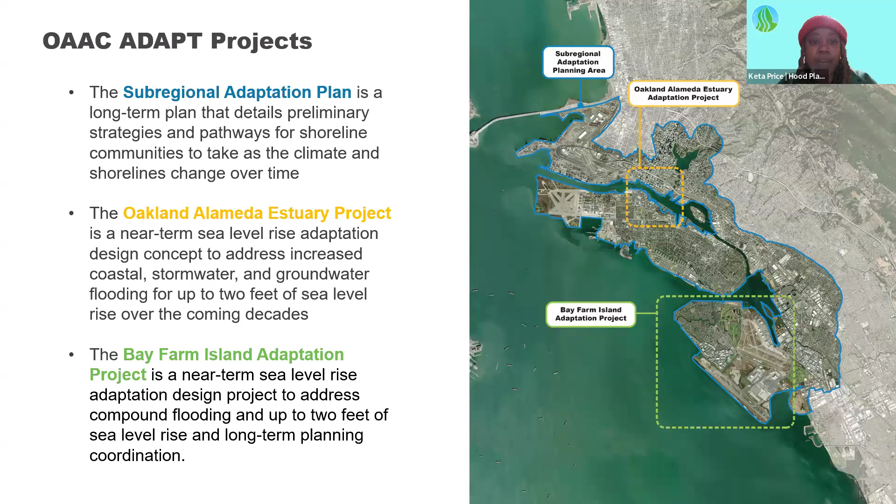Yesterday we had our Bay Farm Island workshop, and if some of you were there, thanks for coming today as well. Today we are really focused on the Oakland and Alameda Estuary project.

There are many other adaptation projects currently underway with other OAAC partners and community partners in our sub-region. Some examples are here: we have Sacred Spaces, which is an outdoor sanctuary at the MLK Junior Shoreline down in East Oakland. We have the San Leandro Creek Trail Greenway, which is providing access from East Oakland to the MLK shoreline. We also have the Port of Oakland's Vulnerability Assessment and Adaptation Plan, as well as the San Francisco Bay BCDC, known as the SF Bay Conservation and Development Commission's Regional Shoreline Adaptation Plan, which we call the RSAP. It's a mouthful and it's a lot to consider, but we want to make sure that we're doing our diligence, not just leveraging the adaptation strategies, but uplifting different values across these different plans that make sense with what we're doing.

Next, I want to share a little bit more of our sub-regional goals as an OAAC committee. We have these shared waterways, so we want to protect our Oakland and Alameda subregion from negative effects of expected sea level rise, inland flooding, and groundwater flooding that we are presented with today and in the future.

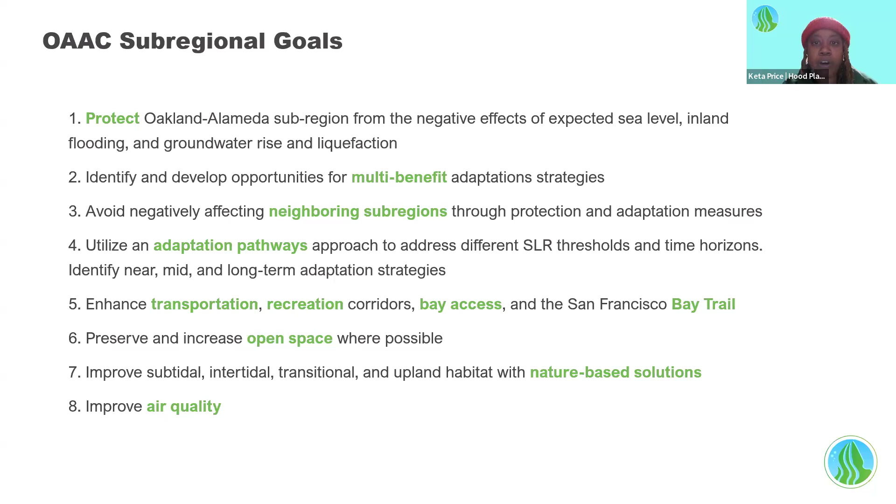Before I hand it off to my co-chair of the OAAC, Danielle Mueller, I just want to go over a few ground rules as we get deeper into our workshop.

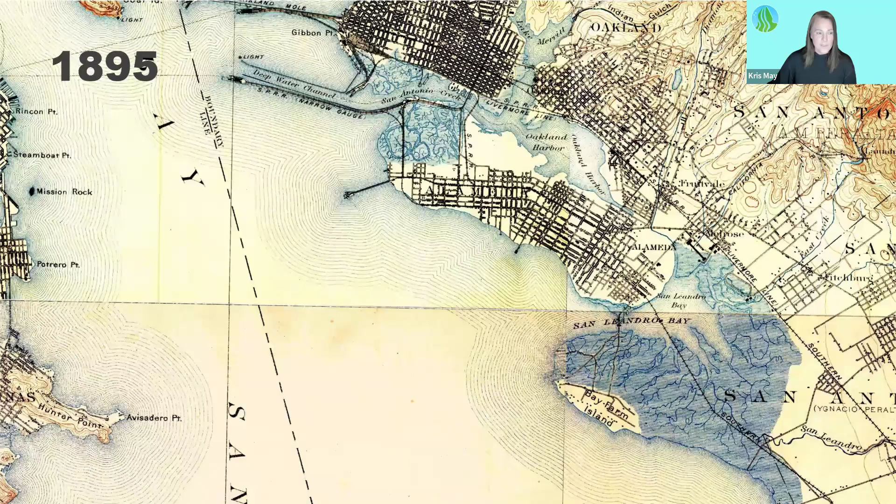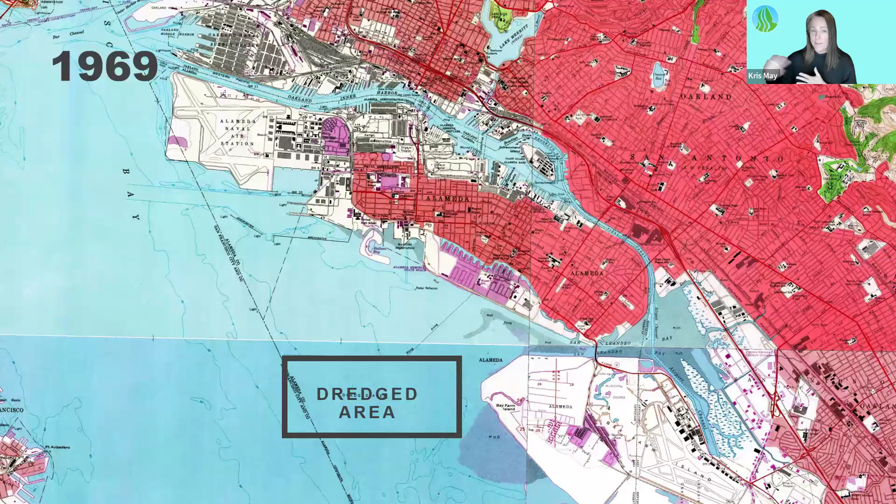So if we flash forward to 1969, that's 75 years later, this area has been entirely transformed and developed. This shows just how much we can transform the landscape over 75 years. I want you to keep this in mind as we think about how we're going to transform this landscape moving forward into the future.

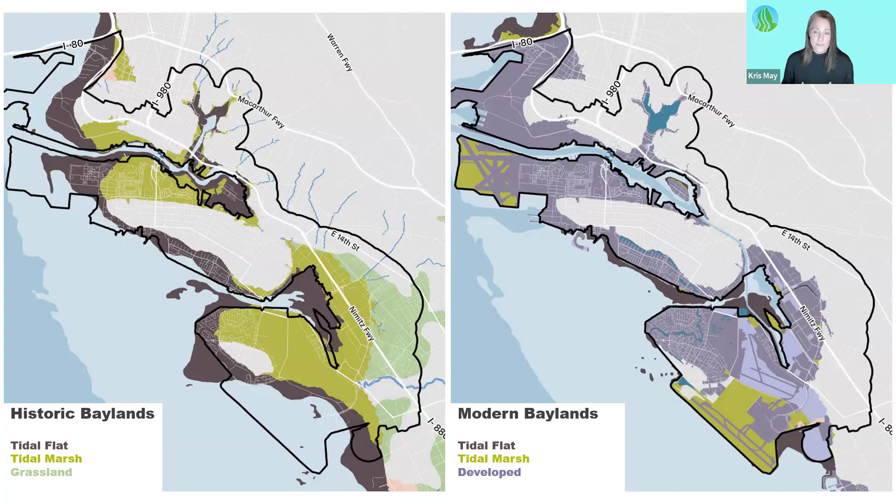So now that you understand a little bit about the past, let's talk about what's coming in the future. Hopefully everyone in this meeting understands that our climate is changing, and in many ways it's changing faster than climate scientists thought it would. Our planet is getting warmer, and this is changing how all of our climate systems function. No matter how well we think we understand what may happen in the future, Mother Nature is always full of surprises, and she usually wins.

Climate change is really changing everything. We are operating under a new rule book, but we don't know all of the rules.

There is a lot of uncertainty related to how fast sea levels could rise over the next 100 years or so. Based on the latest science, we generally use a range of 5 sea level rise scenarios from low to high. The difference between these scenarios relates to how warm the world may get, or how well the global community may reduce greenhouse gas emissions to avoid getting to those higher levels. Based on state guidance, we usually plan for the intermediate scenario, which gets us to 3.3 feet of sea level rise at the end of the century.

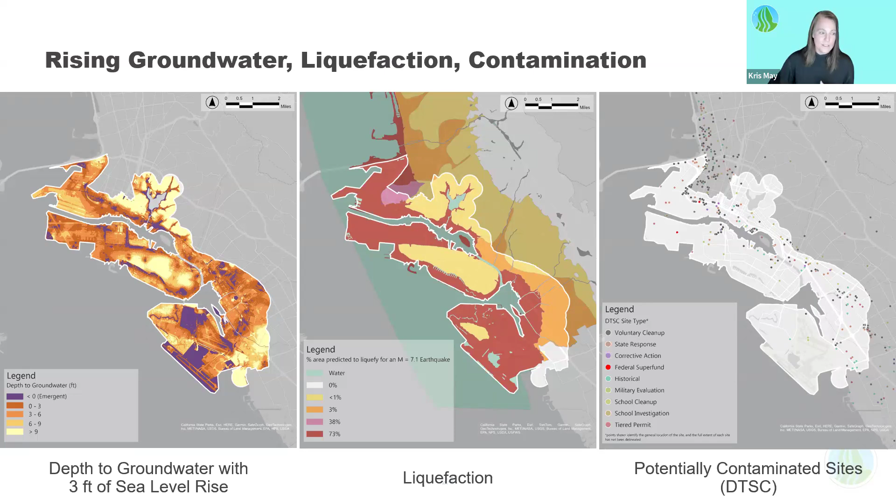In this workshop today, we're really focused on near-term adaptation. What do we need to do first? We're not trying to tackle the entire shoreline in one go.

Our near-term adaptation options are tackling just 2 feet of sea level rise, which could occur between 2060 and 2080. This is our goal, but individual site considerations will drive how high we can adapt in the near term. However, we will always keep our longer-term goal of 7 feet of sea level rise in mind. I mean, I'm only 5'4" tall, so 7 feet of sea level rise is a lot.

Our goal is to adapt the shoreline in a stepwise manner over time so that we're not just cutting us off from the bay and the shoreline prematurely.

So we are starting now with immediate actions that address really urgent risks, and near-term actions that can address that 2 feet of sea level rise. As we design these adaptation strategies, we want them to be flexible to accommodate higher amounts of sea level rise, so we can start planning for the next adaptation action, that midterm adaptation action that would come next.

That midterm adaptation action would come next. And if we're really headed towards 7 feet of sea level rise, we also want to look towards that longer-term adaptation that a future generation might need to implement.

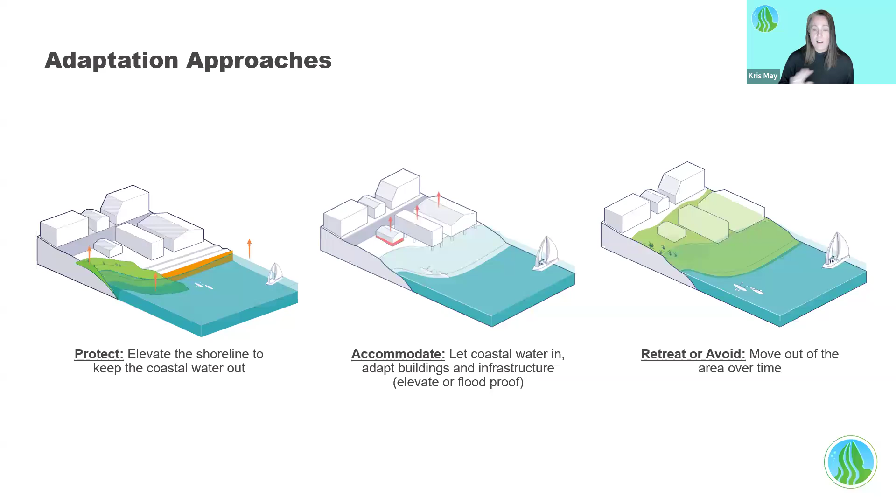Although we may not need to retreat today, it's important to start this conversation, because retreating from some locations could be part of the long-term adaptation plan. Most likely, we will use a combination of all of these approaches along our complex shoreline.

We need to adapt both at the shoreline or around the shoreline for sea level rise, while also managing for stormwater and groundwater changes. This will be a combined adaptation effort that addresses all of the different flood hazards.

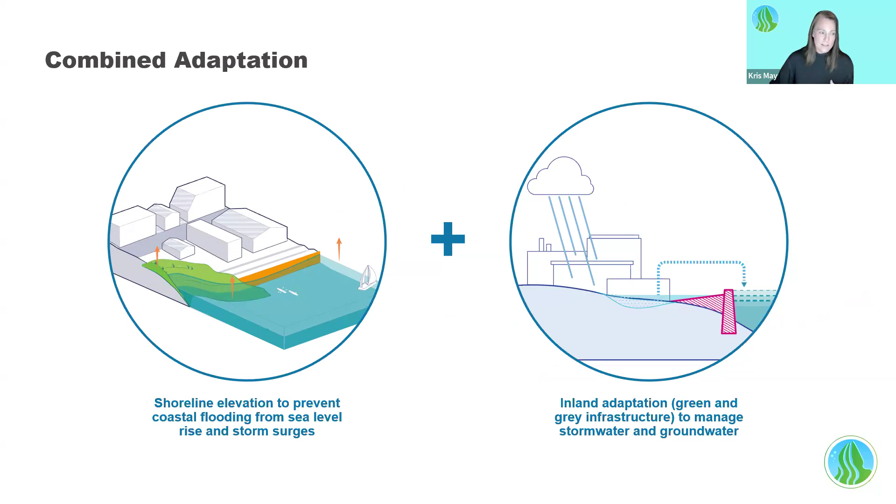This will all lead up to big changes, especially when we look at that long-term planning horizon. These kinds of changes can be really hard when we're talking about where we live, work, and play. I live in Alameda and my home is in that vulnerability zone, so I know it's hard and personal.

But remember how much our landscape changed over the past 75 years? We can implement that scale of change again. And if we do that together in a transparent manner, our goal is to reach good outcomes for everyone.

Remember, today we're really talking about the first adaptation actions, those near-term actions, with the goal of addressing two feet of sea level rise.

We want to design them in a way that is flexible and allows for future adaptation options. That can mean addressing higher amounts of sea level rise, but it also means giving future generations options in what they can do. We don't want to lock them into just one potential option in the future.

The range of options available to future generations is connected to the choices we make now, so we need to design and think with that long-term planning horizon in mind.

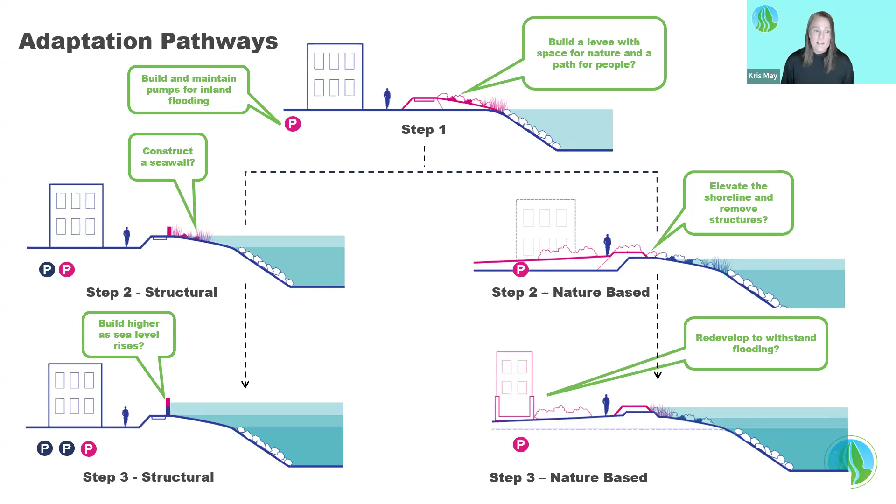There are many adaptation measures we can implement to adapt our neighborhoods to this scale of change. These are just some examples, from gray infrastructure like pump stations and seawalls to nature-based approaches like tidal marshes combined with levees.

We've heard through our engagement efforts to date the importance of expanding opportunities to improve ecological health and providing space for habitat and wildlife. There are already a lot of projects underway around the subregion and around the Bay supporting this goal, including pilot projects and longer-term studies that will help us expand the range of feasible nature-based solutions.

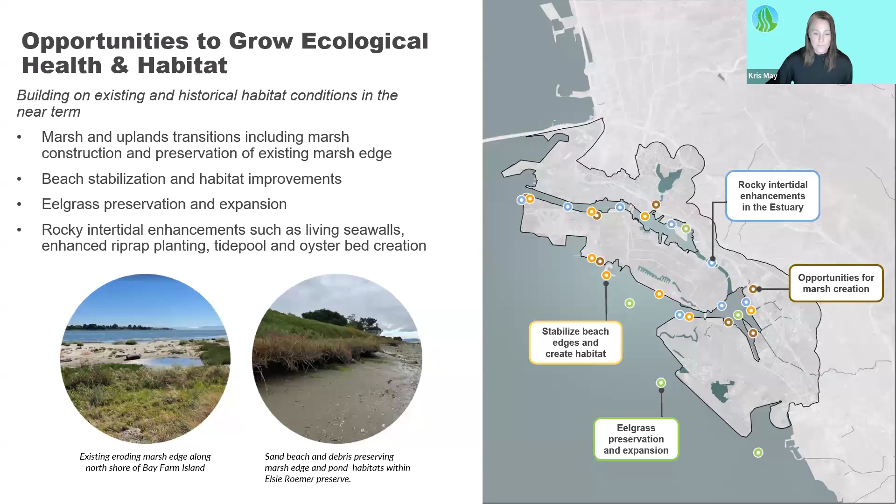Here are just a few examples of how we can integrate habitat and ecology into how we adapt our shoreline, often combining nature-based solutions and more engineered structures in innovative ways so we can meet a combined set of complex goals. And with that, I think we're going to open it up for some Q&A.

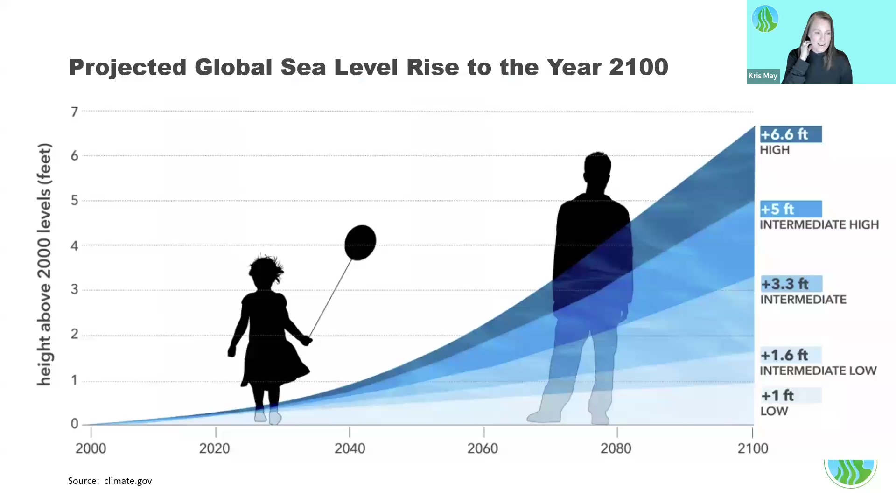We're talking about just one near-term action today on the estuary project for Oakland and Alameda, but we are in the process of developing the long-term plan, really looking up to those higher levels of sea level rise as well, to 5.5 and 7 feet for the entire island of Alameda. So there's a lot of work to be done. It's not going to be easy, and there will be a lot more engagement as we move this process forward and we start talking about strategies in other parts of the shoreline.

One other question, kind of about an area outside of our current project focus. I'm curious which adaptation strategies are being implemented at Alameda Point to accommodate the new development there. I don't know, maybe Chris or Jamie or one of our City of Alameda, or Dilip, I saw you come off mute. If someone wants to provide a little bit more information on that project, that'd be very helpful.

Yeah, I can go. Yes, we were involved with 2 of the developments there, and the strategy there is they are raising the parcels. So pretty much, they have raised themselves out of the near-term sea level rise vulnerability area itself. I think they raised it about 3 feet or 3.5 feet above the 100-year tide. At which point, yes, there would be further adaptations needed, but they have left a significant amount of room to make those adaptations for the future.

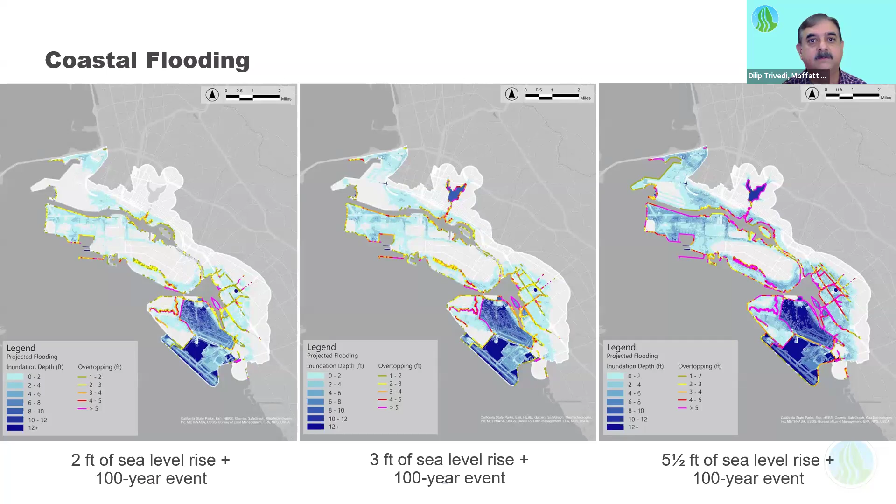Great, thank you, Dilip. All right, so maybe one final pretty big question here, and then we should move on to the next segment of our presentation. As a reminder, we've documented all of your questions and we will be responding to the rest of them at the end. So final question: how is equity and climate justice being taken into account in the strategy and approach? Maybe I'll try to send it over to you, Chris.

Well, I think it might also be a question for Danielle and Kita and others. I think just the way OAC was put together, with such a focus on the community partners, having Kita co-chair the steering committee has been a really big part of addressing climate equity. So I don't know, I might not be the best person to kick it off, but I am impressed with how much engagement this effort has.

Yeah, sorry, I'm trying to look at the question to get it right technically. I can repeat it. The question was just, how is equity and climate justice being taken into account in our strategy and approach? We're just seeing if it was like an approach in the projects or the OAC.

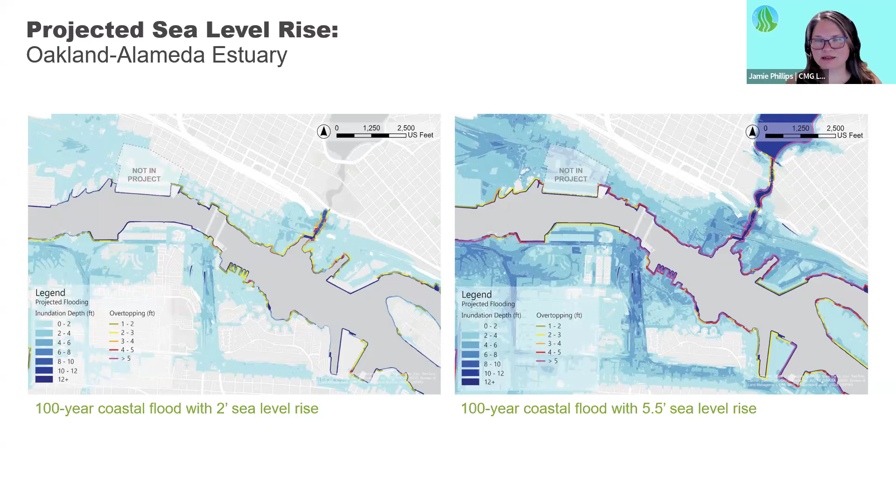With rising sea levels, that will also lead to rising groundwater, and we already experience groundwater flooding in many of these areas. We're also aware that many of these areas may have soil contamination, and with rising groundwater, that contamination could mobilize. So through the course of this adaptation work, in areas with contamination, we may need to do soil remediation as part of these adaptation projects going forward.

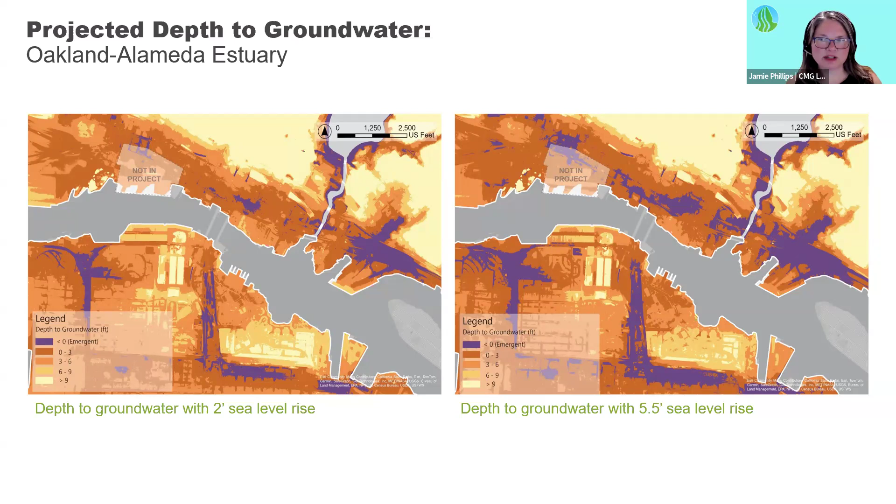It's all connected, it's very complex. But in addition to addressing the risk of sea level rise, there are opportunities in the area to expand bay habitat in the estuary and improve the ecological function of our shoreline.

Then in some areas along the shoreline, we have a little more space, so we may be able to construct gravel and cobble slopes that create more intertidal habitat, and places for people to get down to the water's edge as well.

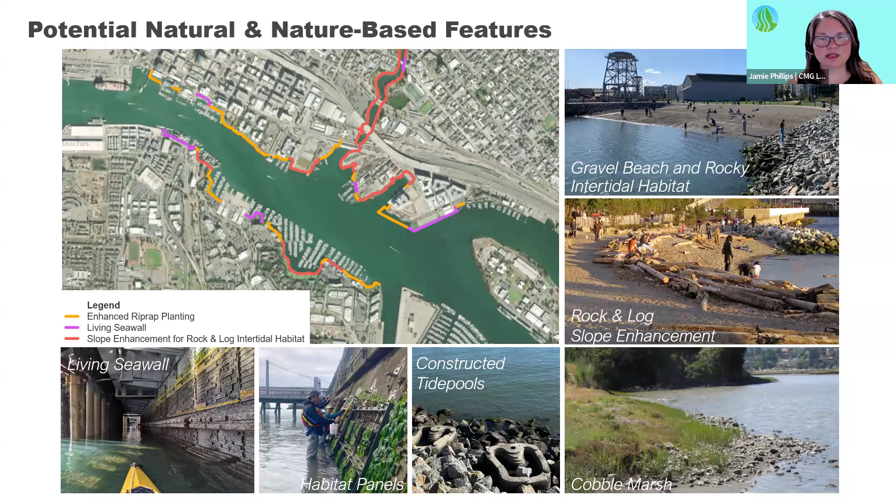Since this summer, when we saw you all at community workshops, we have further evaluated the alternatives we shared, and we've refined those alternatives into design concepts.

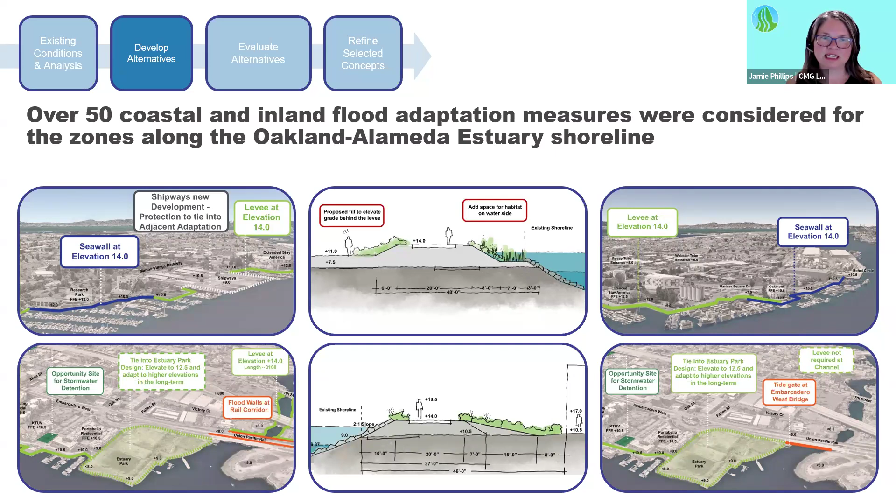The team looked at over 50 ways of approaching and adapting the shoreline along the estuary. We then took those alternatives and assessed them individually relative to the OAAC project charter and the project principles Keita read out at the beginning, as well as project planning principles that are part of the region. We evaluated the alternatives relative to each other.

We considered how they can meet the priority evaluation criteria that we all developed together. Some of that evaluation is things like: does this provide coastal flood protection? Is it possible for it to be FEMA accredited coastal flood protection? And what is the cost of this adaptation measure relative to another?

Throughout the estuary project, we took a look at those alternatives, and then elevated the ones determined to align with the OAAC charter, the project planning principles, and the priority evaluation criteria - identifying which was best for each zone of the shoreline. We developed those into recommended concepts that I'm going to share with you today.

These concepts are not fixed or final. We just have to take each step along this long path that we're on together, and this is one of the first steps toward developing these concepts. They meet the goals of the project, but will require further study around feasibility and cost, and how they fit in with other plans for development and infrastructure within the region.

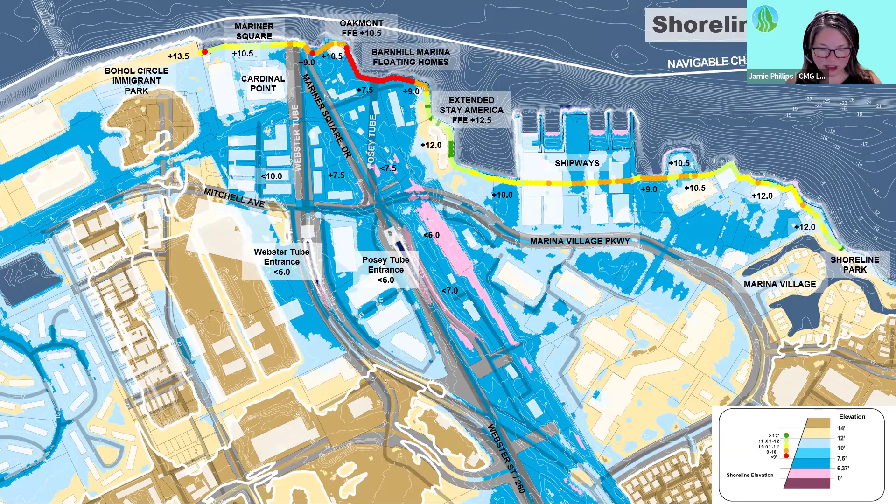Looking specifically at the edge, you can see the red showing us the lowest point along the shoreline on this northern edge of Alameda. That red zone is the area most susceptible to coastal flooding from the shoreline overtopping. Those elevations are actually below today's king tide, so it's extremely low - that's why it's a near-term project and we're working on a way to solve it.

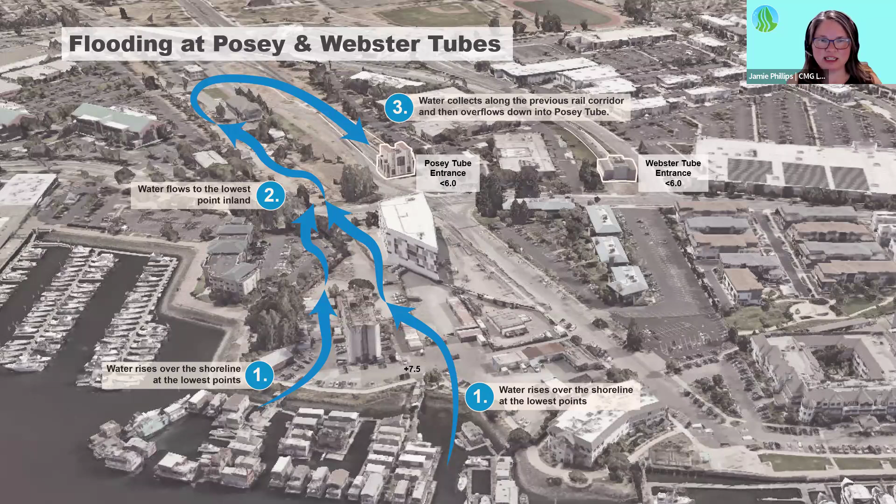This is another view of that area to describe the concern. Down at number 1, this is a very low shoreline. The high tide could overtop here, and it actually continues to be low on the way inland. So water could overtop the shoreline, flow inland along this low elevation, and then flood the entrance to the Posey tubes.

So we are at this stage where we have a proposed concept for this adaptation. I have two reaches I'm going to take you through and zoom into. I'll show you first this western section that goes from about Cardinal Point down to the Shipways area, that upper left. Okay, zooming into this plan.

Let's look first to the left side there. That is a stretch from basically Bohol Circle Immigrant Park around to Oakmont. Today there is a seawall there, and there's also limited space between the Oakmont residential building and the shoreline. So for this first reach, we are recommending a seawall, constructed to the water side or outside of an existing seawall that is there today. The area is narrow and the constraint of the existing seawall pushes us to recommend this. But seawalls are one of the most expensive adaptation measures, so we've tried to limit where we propose them. They require extensive environmental permitting and agency coordination, and when we think about adapting further into the future, they're harder to adapt — it becomes a wall higher than humans, and we start to disconnect ourselves from the shoreline.

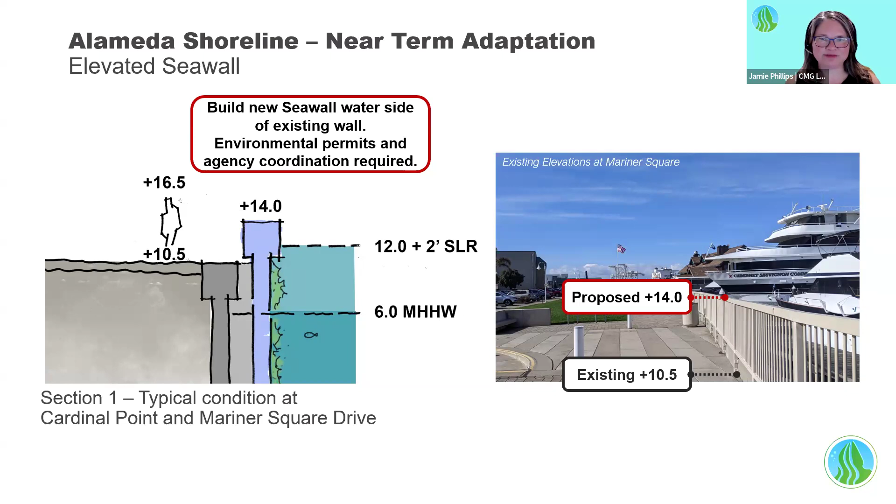In this location, though, we'd be proposing one of those living seawall solutions, so we do have the ability to add some habitat and ecological value there. Going back a slide to point this out again — this seawall would stretch from Cardinal Point all the way around the Oakmont residential building, primarily because of how close Oakmont is to the shoreline and the existing seawall that's there today.

So the next reach we'll look at is between these two red marks, the Barnhill Marina. That's the zone at a very low shoreline elevation today. What we propose here is a levee to protect the shoreline, raising the edge to elevation 14. This would protect the inland side, and also protect access for those living in the Barnhill Marina floating homes, so they can have pathways and ways to get out to their homes from their parking area. There would be a bay trail along the top of it, and a bit of space on the water side for some intertidal habitat, with park space and pathways on the inland side.

So to look at that in a section, it looks like this. This is one of these areas where there's physically more horizontal space between the shoreline and any structures in the Barnhill Marina area, which gives us more room to work. You can see this very low elevation in the lower left, elevation 7.5, and we would need to build this levee up to elevation 14 to protect in the near-term horizons that Chris May described, protecting for 2 feet of sea level rise.

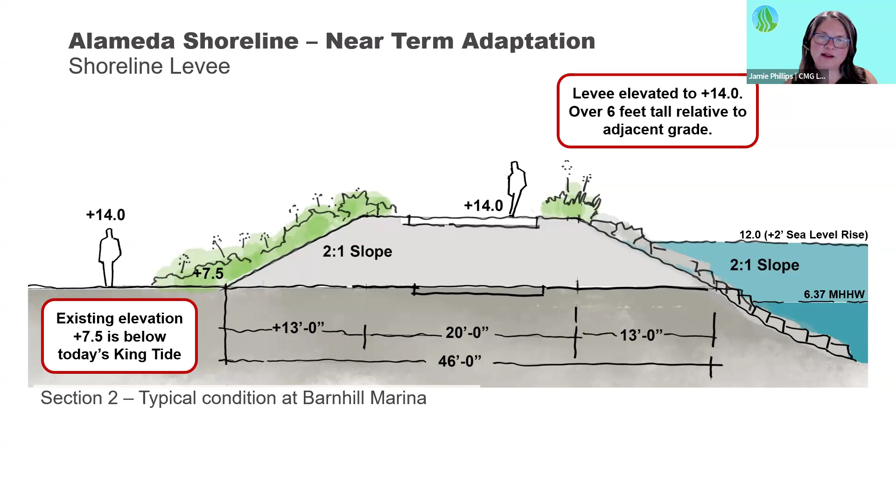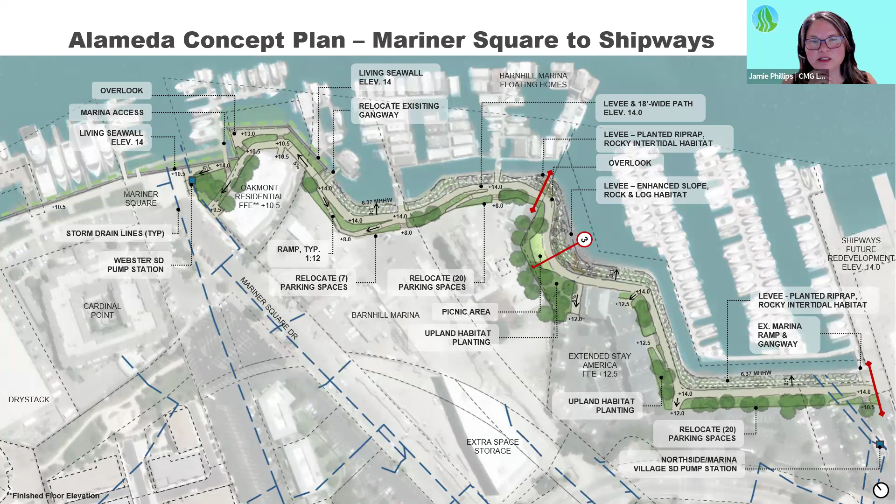The third reach here goes from Barnhill Marina down to the Shipways site. Here again we have more horizontal space between the shoreline and say the parking area at the hotel, but also the ground elevation comes up here as well, closer to 12 or 12.5. So the improvements don't end up needing to be as high. Here's a perspective view starting to describe how, when we raise this elevation from 10.5 to 14, we start to get some habitat value on the water side, and then grade back into park spaces so the whole thing feels like a more connected and accessible public space for everyone.

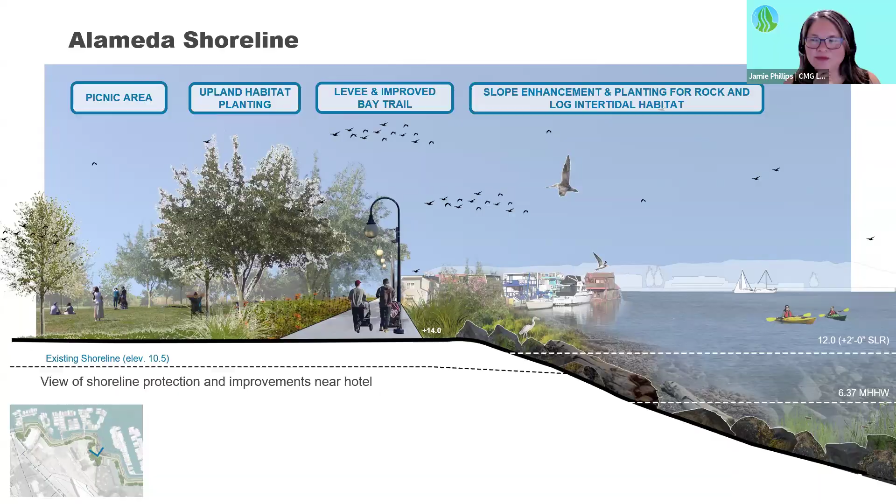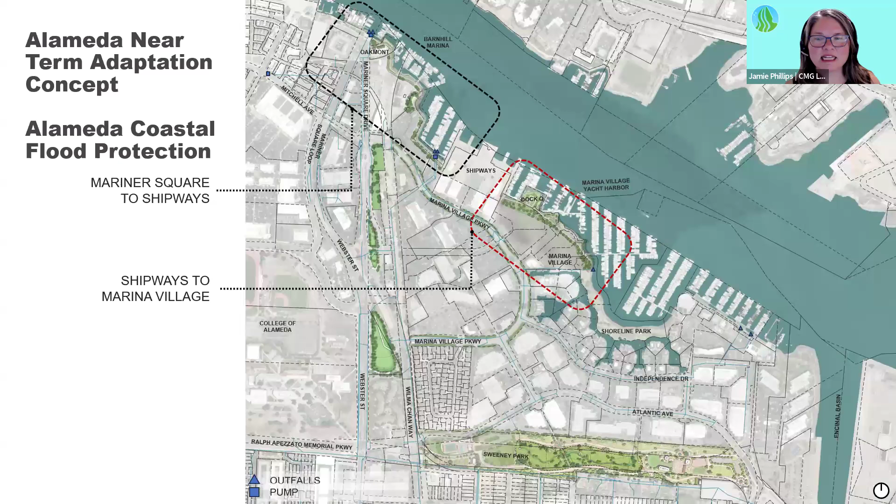And then there's the Shipways site, and another reach that we studied. I want to mention that the Shipways site has a separate redevelopment planning project underway — they are also looking at an adaptation for that site up to elevation 14. So we will coordinate with their proposal on both sides, tying in our improvements to theirs, so we start linking all of these together.

So this is the Marina Village commercial area between Shipways and Shoreline Park, not the Marina Village residential area. Here we're taking another approach. We've had some very preliminary conversations with the property owner — the existing buildings are very close to the shoreline, some within 10 feet, so there's very little room to fit adaptation in there other than a seawall. It's possible this property could be redeveloped in the time frame we're talking about.

And this is another way to think about adaptation at the shoreline. If those existing buildings are removed, the elevation of the entire site could be raised up to 14 and 13, so that we're both protecting from sea level rise flooding and helping with inland flooding — the higher that you are. So this concept plan starts to propose that there would be a park along the shoreline. BCDC's redevelopment guidance is that there should be 100-foot wide public access along the shoreline when there's a redevelopment project.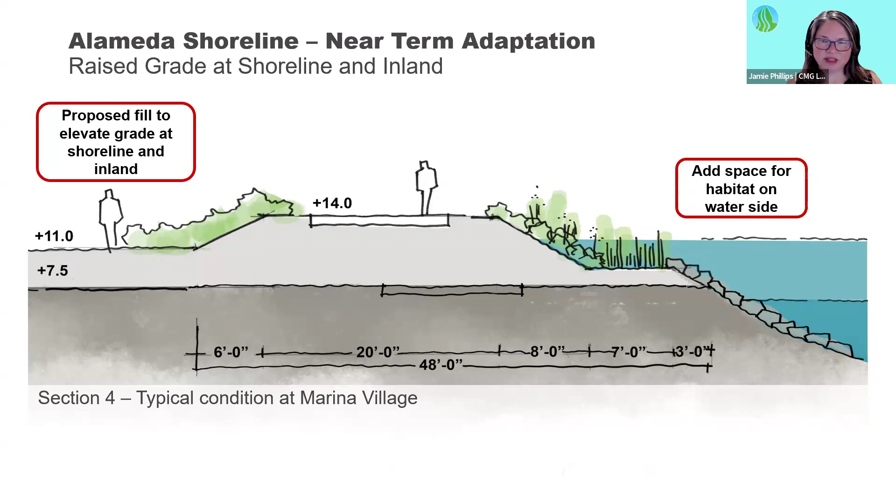In Alameda, we also have put together concepts for adapting to inland flooding. As Chris May described to us, in addition to needing to protect the shoreline from sea level rise, we then also need to protect inland areas from rainwater that gets trapped behind that protection. So we need to add some storage capacity into our storm drain system.

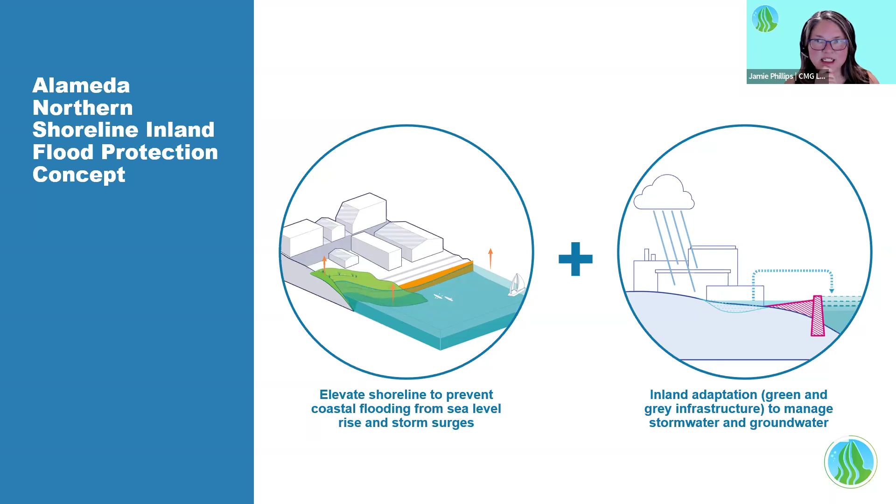So we took a look at this area that is in the same area as the near-term project. This is the storm drain system watershed for this part of the island that flows through the area that we're studying. And this storm drain system today, currently there's a volume of water that is not captured in today's system. So if there were a 100-year, 24-hour storm, all of that stormwater does not fit in today's system.

In addition to that, we expect that with climate change, precipitation will also increase, so we expect there to be even more stormwater that we need to manage in the future. By thinking through this, what I'm about to propose, we're trying to build in capacity for today and in the future so that we can prevent these areas from flooding, people's homes and their neighborhoods. So the idea is that we would build in areas where the storm drain system could detain water without flooding homes and neighborhoods, detain it for a certain amount of time until it stops raining, the tide goes down, and that water can either flow out to the bay or can be pumped out.

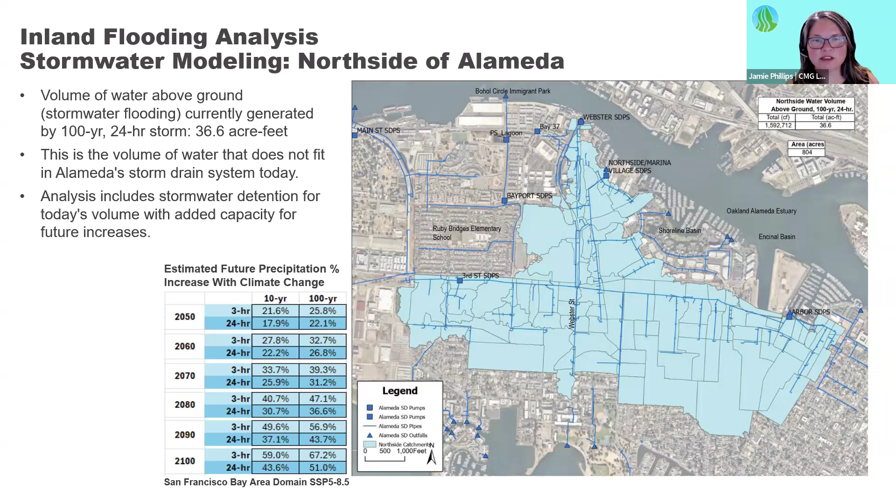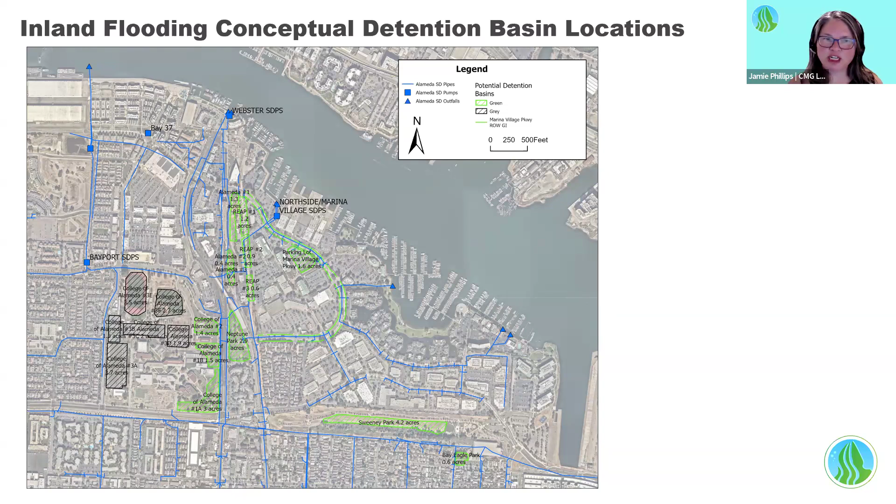So we did study several different areas to look for detention in this watershed. All of them have different pros and cons. Some of the existing land use, some of them are not owned by the city of Alameda. Some of them only work because of their ground surface elevations relationship to the storm drain system's invert elevations. So we took a look at all of these areas, and then we worked our way toward this collection of areas that are on city-owned land or Caltrans-owned land, so that we can start to address the near-term stormwater detention needs in this watershed.

So how this system would work is that during a storm, runoff would be temporarily redirected into these basins and held here until the rainfall stops and they can flow back out. These detention basins sound like infrastructure, but they are green infrastructure. The idea is that they will be at home in a park. The water is stored in the rock layers below in the soil, and then with some ponding.

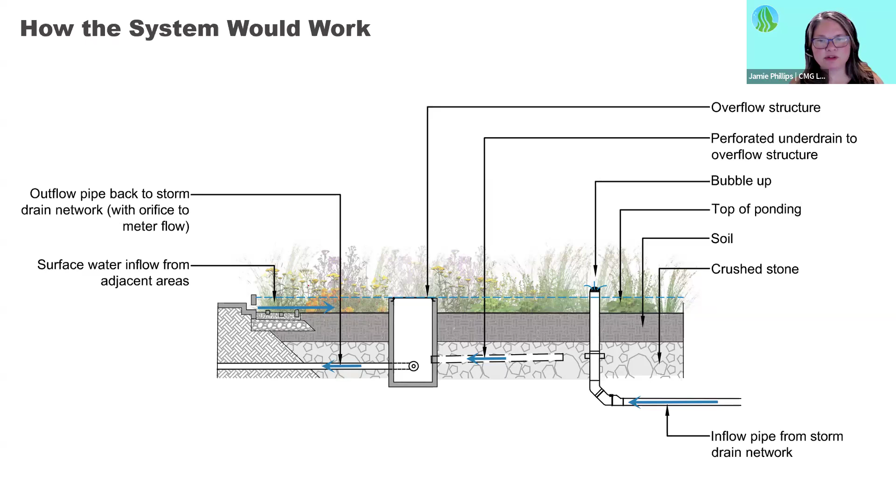This is listing out the areas that we are proposing for the near-term project to get to that original 36 acre feet that we are trying to detain in the near term, but also need to remind everyone that there is going to be more water as time goes on. And so we will need to look for even more detention space in this watershed, as well as watersheds all around Alameda.

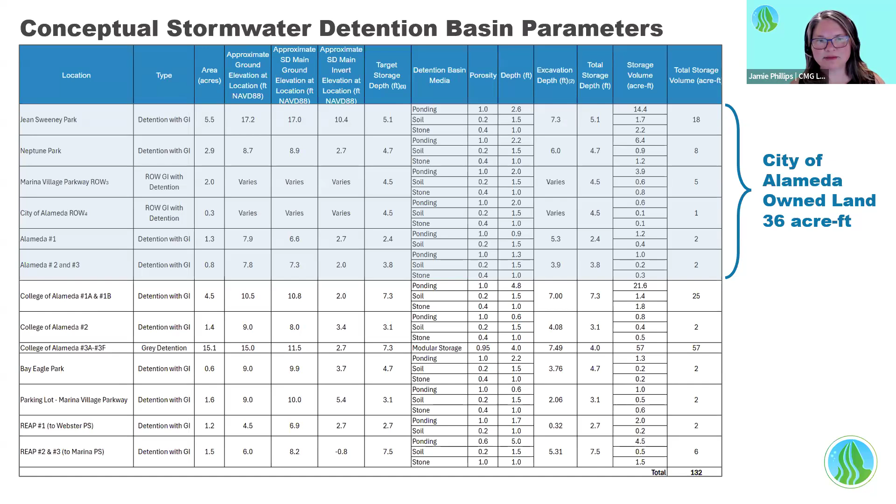Okay, let's take a look at Oakland on the northern side of the estuary. Just want to remind everyone we need to look at both sides of the shoreline together, so that something we do on the Alameda side does not negatively affect the Oakland side of the estuary.

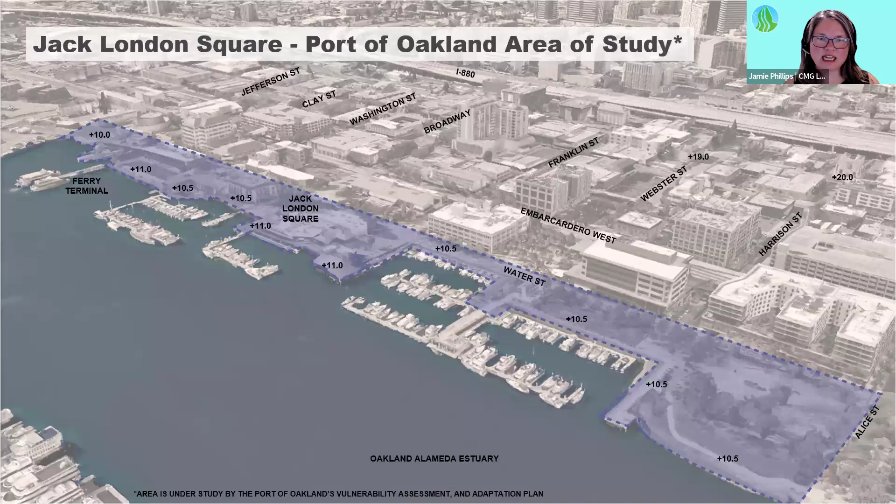Because these other projects have parallel efforts going, just for tonight, we are focusing on the shoreline adaptation from Alice Street to Lake Merritt Channel.

If we look at Lake Merritt Channel here on the right, we see that the Estuary Park is a project that has also been underway with the city of Oakland for a while. That Estuary Park redesign includes elevating the grade of the park up to 12.5, and then another step of future adaptation later, as well as a plan to adapt the aquatic center as sea level rise gets to the elevation that triggers that. So that part is already underway and will be part of the adaptation solution in this part of the shoreline.

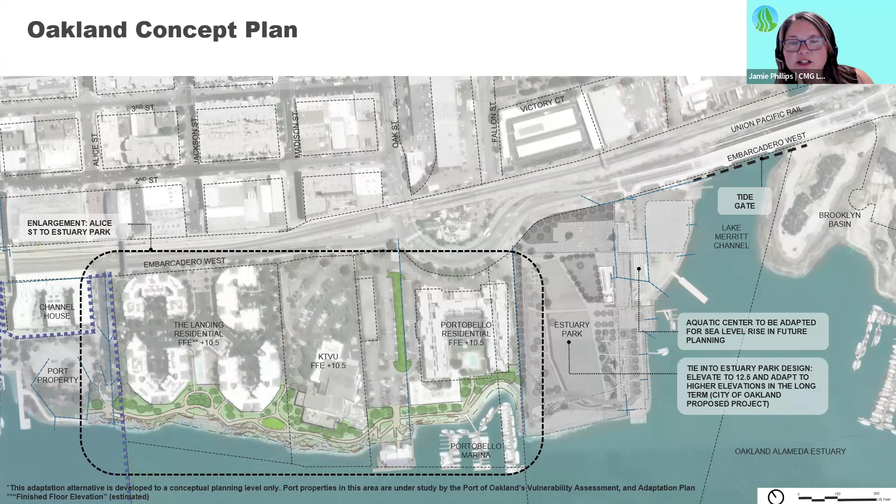At Lake Merritt Channel, the complexity of the transportation infrastructure and the low elevation of the rail line limits the alternatives at that portion of the shoreline. One concept is to build a tide gate across the entrance to Lake Merritt Channel to prevent the rail line from back flooding into Oakland.

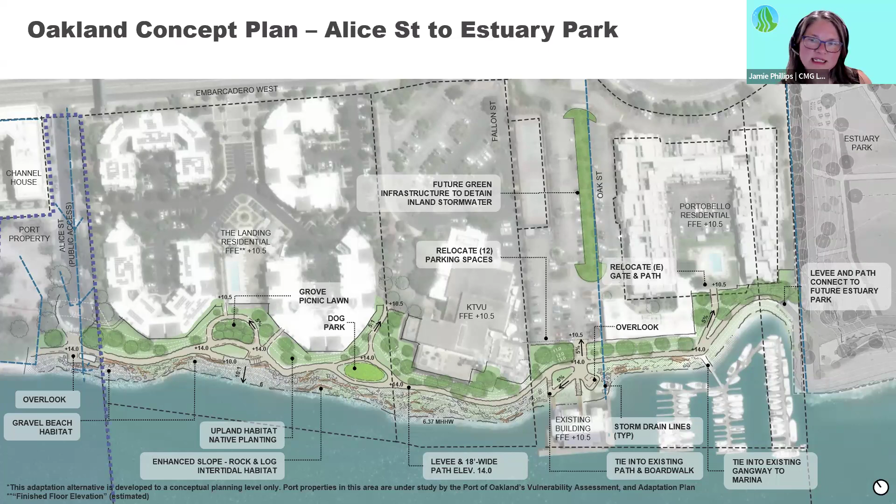Between Alice Street and Estuary Park, the concept proposed makes the most of this space by adding a lot of space for intertidal habitat and beaches on the water side, providing the bay trail across the top of the shoreline protection, and then providing parks and park amenities on the land side between the trail and the residential.

Here is a view of how this portion of the shoreline could look with the bay trail near the Landing residential building. The levee moves a little bit inland in this example. The shoreline is widened, so we have more opportunity for a variety of habitat on the shoreline side, and then lots of planting and habitat on the inland side as well.

So these are the concepts, and I just want to recognize again that while this change is very daunting and this adaptation project is a huge undertaking, we really hope that the vision set forth by the OAAC, the Oakland Alameda Adaptation Committee, can be achieved. We really hope that together we can create an inclusive, accessible, and protective nature-based shoreline for your community.

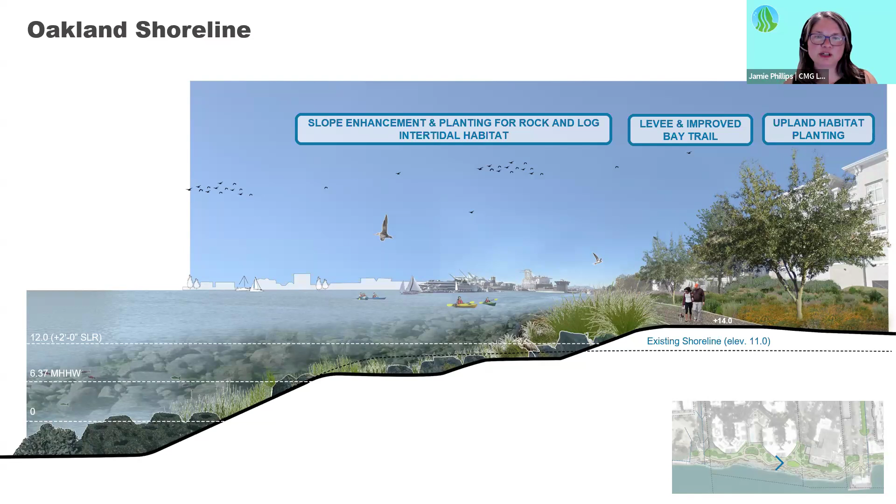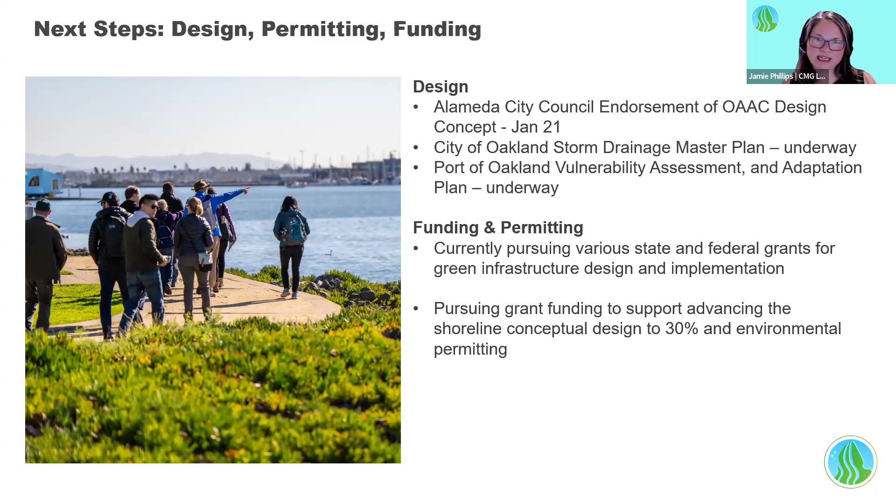Here are the next steps for this project. We are going to the Alameda City Council on January 21st. As I said, the City of Oakland and the Port of Oakland also have important adaptation projects underway, and the team is currently pursuing various state and federal grants for green infrastructure design and implementation. We're pursuing grant funding to support advancing this shoreline concept from conceptual design, which is 10%, to 30% design, which gets us to the step where we can engage the environmental permitting agencies.

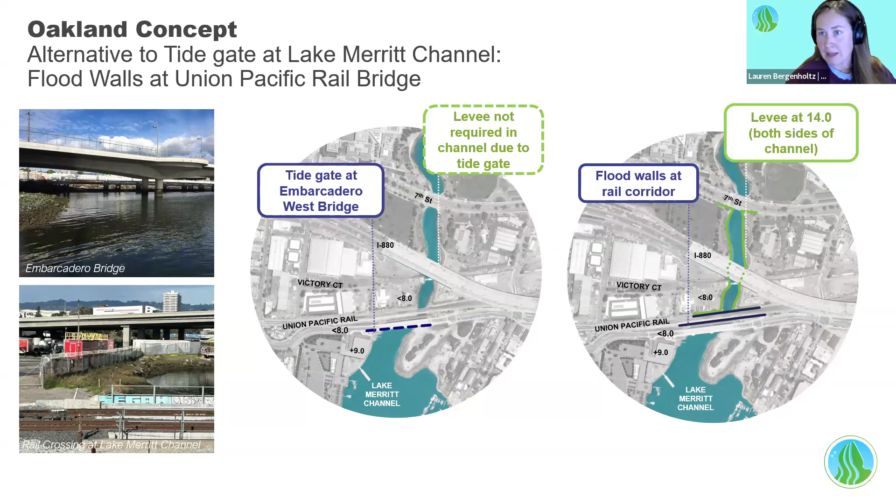Thanks, Dilip. So we have a few questions, I think generally about how this project is coordinating with other work happening in the area. How much input do we have regarding how developers along the Oakland Alameda shorelines design and build shoreline developments? I think we could speak to that specifically in terms of adaptation guidelines. And then another question about De-Pave Park - are we working in coordination with De-Pave Park? I think we could expand that to talk more broadly about other park development or redevelopment work happening in the area.

Do you want me to start, and Danielle or Gail, do you want to chime in? Well, as part of this project, we need to make recommendations that will work their way through the process that sets up planning policies, so that other redevelopment projects know about this information and know their projects need to address this. For example, the shipways redevelopment is already looking at redeveloping and elevating to the same coastal flood protection elevation, similar with Estuary Park. All of the projects right in the region where we're working, we're pretty knowledgeable about, and we're coordinating with those teams about that work.

I would say going forward, there definitely would need to be more information written into the city's policies to address this. This is all pretty new science here.